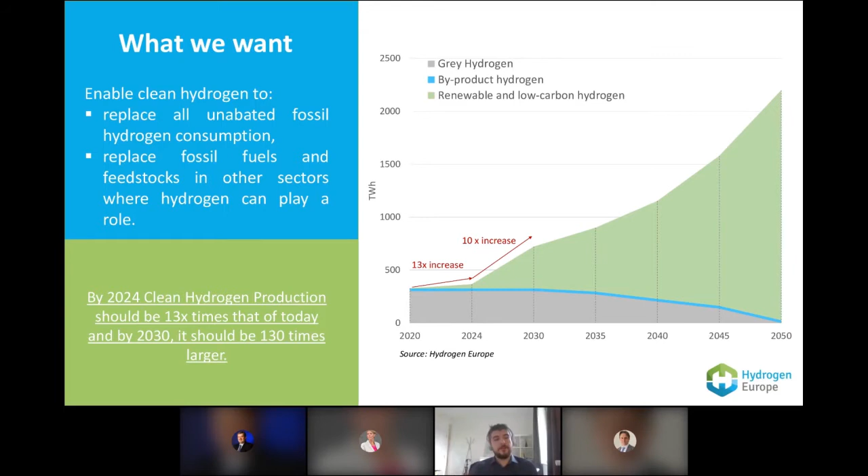So, what is the development we are expecting in the next decade? Well, it is very ambitious. As an organization, we are working to replace the consumption of unabated fossil hydrogen where it is used today, and at the same time, replace other fossil fuels and feedstock, gas, coal, diesel, heavy fuel oil, kerosene, in all the sectors where hydrogen can play a role. In quantitative terms, clean hydrogen, for us, will begin taking up market share from both unabated fossil hydrogen as well as other fossil fuels, slowly in absolute terms, up to 2024, but experience a very large scaling up in the years up to 2030. But enough about what we want. That's probably not interesting. What does the EU want?

The European Commission has estimated that the share of hydrogen in Europe's energy mix will be approximately 13–14% by 2050, with some estimates putting it even higher. So in order to prepare for this, they launched last year their vision for an integrated energy system. And within this system, they placed hydrogen as a key enabler of that vision. And it is for this reason that on the same day, they launched the EU hydrogen strategy and the EU Clean Hydrogen Alliance. Together, they would work towards the deployment of 2 times 40 gigawatts of electrolyzer capacity in Europe and in Europe's neighborhood, dedicated to the production of hydrogen.

The vision of an integrated energy system with hydrogen as an enabler enjoys in the EU a very strong political support at the highest level, and this can be seen in the statements and positions expressed on several occasions, both by President von der Leyen as well as by Vice President Timmermans.

Their, and not only their, political commitment to empower hydrogen to finally play a role as an enabler of decarbonization has been a very strong driver behind the increase of attention that we are seeing to hydrogen in Europe today. But why this? Why so much attention and why so much enthusiasm?

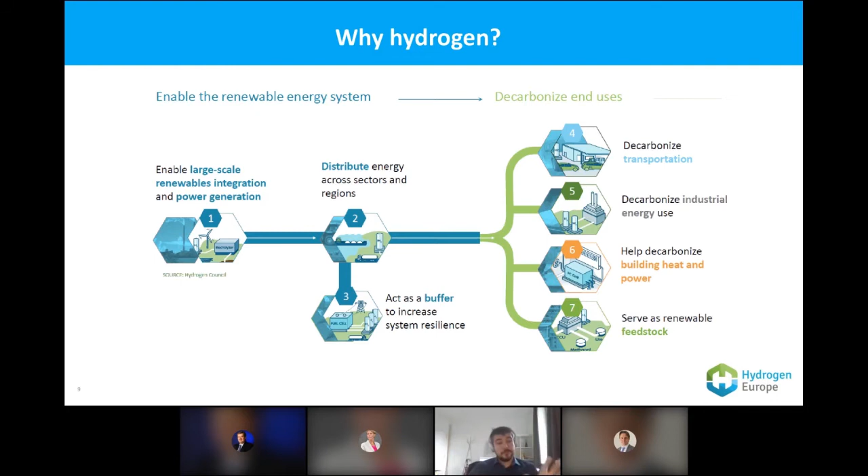This is made possible because in the form of hydrogen, renewable energy becomes easily transportable across time and across space. It is approximately, and this is an oversimplification, 10 to 20 times cheaper to transport renewable energy as hydrogen than to transport it as electricity. And basically, this helps offset the conversion losses that are incurred in the production of hydrogen. But I will get to this point later as well.

Now, these facts were not lost on the world. Most of the world's GDP either has already adopted or is working on a national hydrogen strategy, each of them focusing on unique advantages and needs of their own geographies. For example, Canada is investing heavily in low carbon hydrogen based on natural gas and carbon capture, while the EU is focusing on leveraging their strong renewable energy generation capacity. Japan, on the other hand, is looking to import energy in the form of hydrogen, and it's looking for hydrogen to fuel their large transport sector.

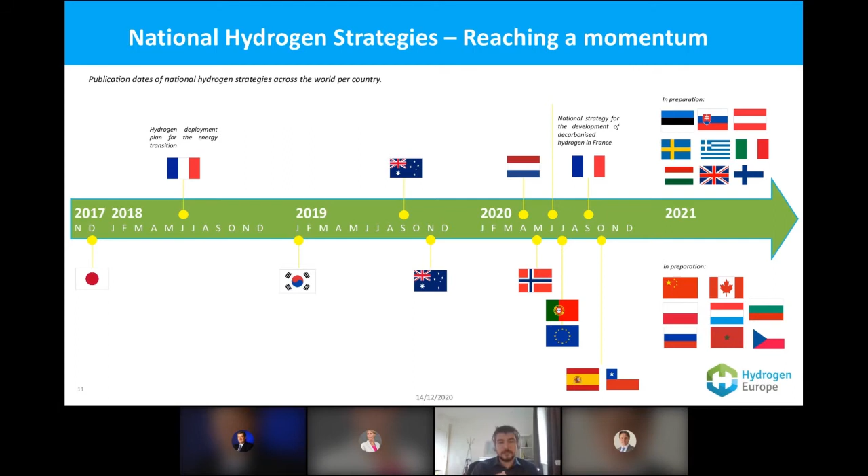The momentum enjoyed by hydrogen at the moment is nothing short of impressive. While things were going rather slow until 2019, with only Japan, Korea, and Australia having a national strategy and France having an initial plan, everything shifted into high gear in 2020. And from where I stand, it shows no signs of stopping anytime soon. Let's look at the EU, the region that I know best.

In the EU, six countries, the Netherlands, Germany, France, Spain, Portugal, and Norway, published national hydrogen strategies. And together, they've earmarked more than 40 billion euros for hydrogen development in their strategies. 13 more countries are currently working on their own strategies. And we look very much forward to seeing how these would look, what measures they will have, what targets they will set for production, and what funding they will make available.

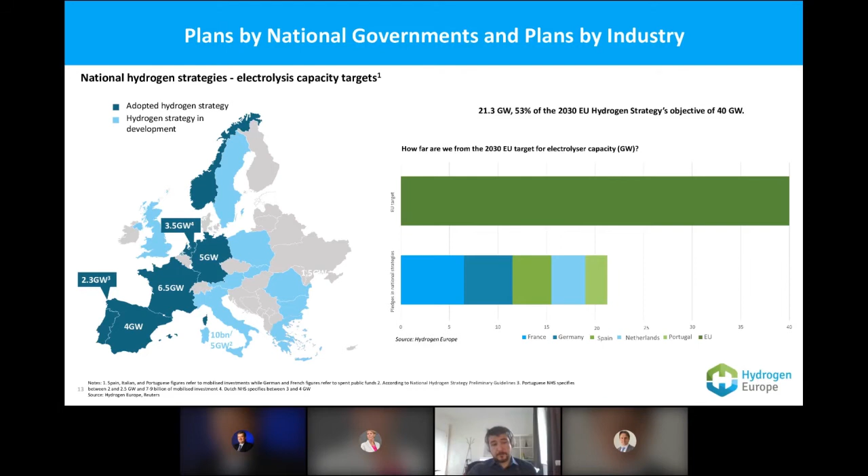In quantitative terms, again, I like looking at things from a quantitative perspective as well. If we sum up the production targets of just the six countries which have published strategies right now, we arrive at around 21 gigawatts of electrolyzer capacity in Europe, which is more than half of the target proposed by the EU hydrogen strategy.

For those of you who are wondering or considering asking me, these are not just political dreams by politicians who just want to say things. This is supported by industry as well. We, as Hydrogen Europe, as the representatives of industry in Europe, we're monitoring the credible and concrete plans to develop hydrogen production in Europe. And we are keeping a database of projects.

So based on our current pipeline, based on what we know so far that has been announced, we are monitoring more than 150 projects amounting to 25 gigawatts of electrolysis capacity to be built until 2030. And this is equal to around 12 billion euros of investment in electrolyzer capacity alone. And that's not counting the other investments in balance of plant and associated renewable energy.

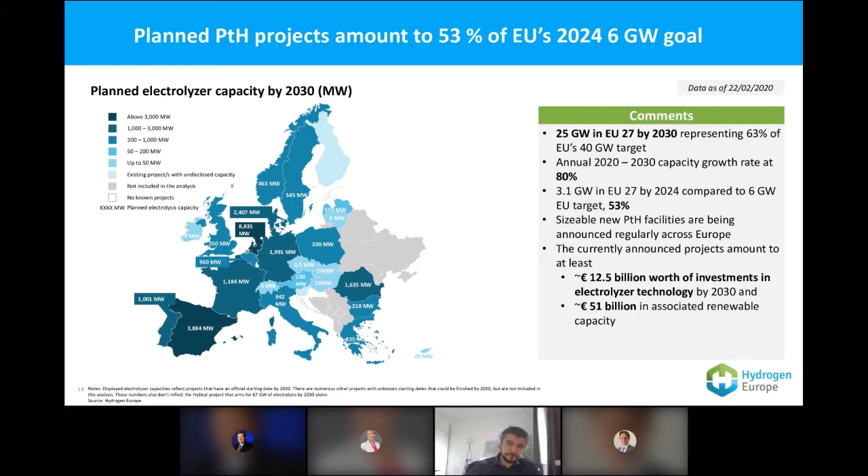But I would like to take a step back. I would like to focus on why. Why are we talking about hydrogen so much? Why is the world talking about hydrogen? Why do we want to produce hydrogen in the first place? How does it really help with higher renewable integration, as I mentioned at the beginning?

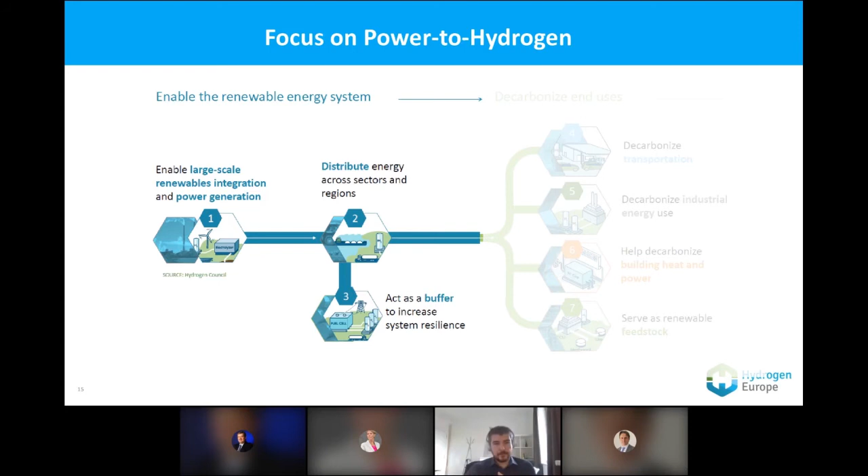Well, the key word of that is variability. Energy production and energy consumption is not stable. It fluctuates daily, weekly, and importantly, seasonally. Everyone here knows this, so I won't insist too much on this point. And not only does it fluctuate in time, it fluctuates in space. We have production areas and we have consumption areas. Some of them are not the same.

But what I would like to say is that even though these temporal imbalances are currently not a big issue, they are all being dealt with efficiently through dispatchable power plants, with pumped hydro storage and other storage solutions. But as we move towards full decarbonization, this picture will change radically, and will change in 2 major ways.

One, as we move towards more electrification, the electrification of transport, electrification of heating, this would alter the standard electricity load characteristics. Especially the electrification of heating will have a huge impact on seasonality.

And the second shift is, of course, the growing penetration of variable renewable energy, which will not only remove the flexibility given by fossil fuels at the moment, but will also generate new challenges related to the irregular character of RES. So it is practically undisputed that achieving carbon neutrality in an efficient way will require energy storage. And I have to thank the presentations before me for making this point, so I don't have to.

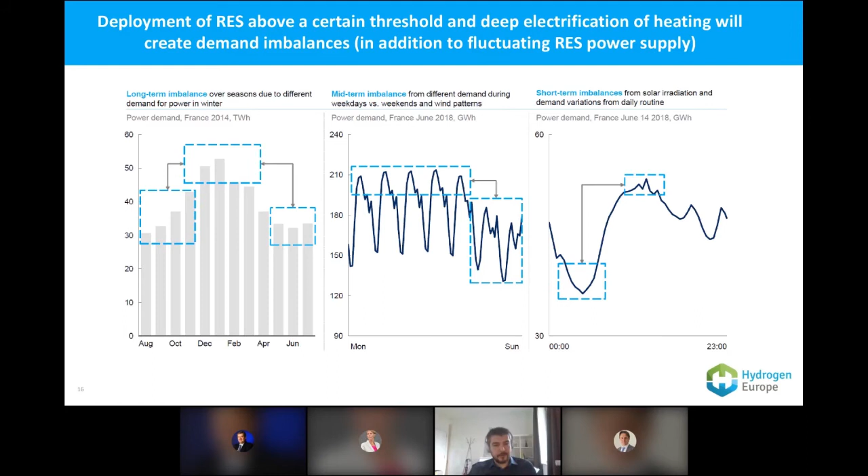And as we saw from today's presentation by Anneli, there are many options for energy storage. But when it comes to large scale and seasonal storage, there are very, very few options that can play this role as well as hydrogen does.

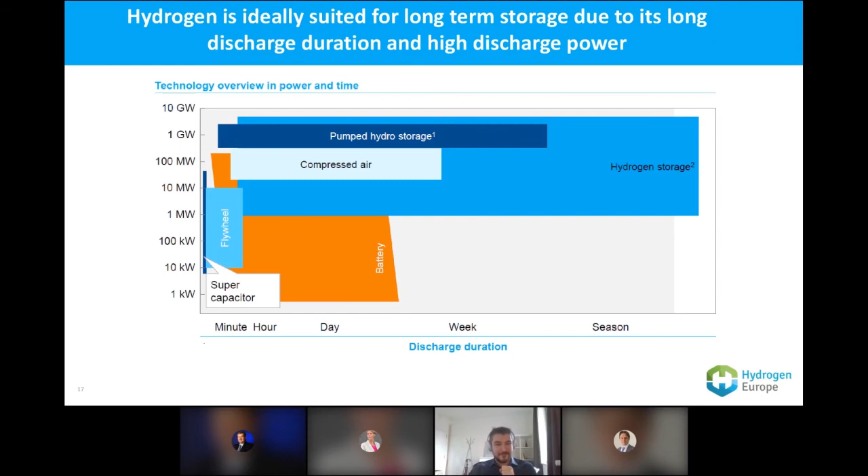I won't insist too much on this because we've already heard 30 minutes from Anneli, but practically, in the face of all the challenges that I mentioned earlier, to decarbonize at the same time transport, heating, power, the only option is to either produce hydrogen or to structurally build an overcapacity of renewables. And it's easy to see why building overcapacity of renewables is quite a bad economic option and is not realistic.

So the relationship is very, very clear. The more renewables you have in your power system, the more power to hydrogen you need to enable it. And of course, the amount will differ system to system, and it will depend on a number of factors like the mix of the renewable energy, whether it's PV or offshore, whether you have in that country availability of other storage means such as pumped hydro, etc.

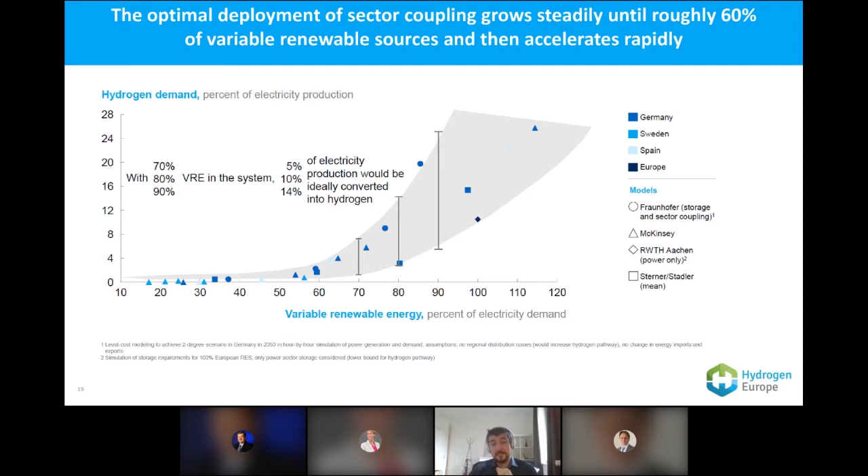But the key is to remember that this graph here, designed by various research institutes in Europe, only looks at balancing the power system and how much hydrogen you need to produce to balance the power system, and doesn't take into account that the power system is only 20% of total energy demand. So this graph looks at power to hydrogen only from a balancing perspective and doesn't consider how much hydrogen you actually need to meet demand for hydrogen in the other consuming sectors that I mentioned earlier.

And as I said before, achieving carbon neutrality will require renewable energy, not just for electricity supply in the power sector, but also for heating, for mobility, for aviation, for shipping, for industry. To decarbonize all these, we will need much more renewable energy than what is required to just decarbonize the power grid. So the question is now, how are you going to deliver all that renewable energy?

And I want to start with how you won't be able to do it. And I know this has taken so much space in the debate, but I need to show you this. You won't be able to deliver this renewable energy with the electricity grid alone. Here you can see a simple, and I will admit it's an overly simplified simulation using a tool provided by the Electricity TSO Association. And it shows what would happen if you would add just 100 gigawatts of offshore wind in the North Sea. Basically, what it shows is a complete collapse of the grid.

And for reference, the EU offshore wind strategy sets a target of 300 gigawatts of offshore wind by 2050. And in reality, much more will be needed, also with the addition of onshore wind and solar PV. So I cannot stress this enough. If renewable energy producers want to access the sectors that are not currently using electricity with renewable energy, the power grid on its own will not be their solution. The current way of doing things, where you just develop a RES park and plug it into the grid and see what happens, won't work anymore in a system dominated by renewable energy and a system that needs to be fully decarbonized.

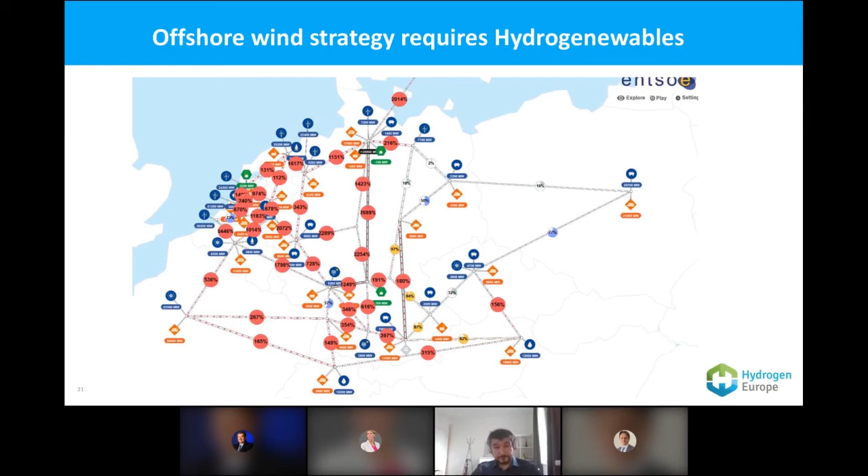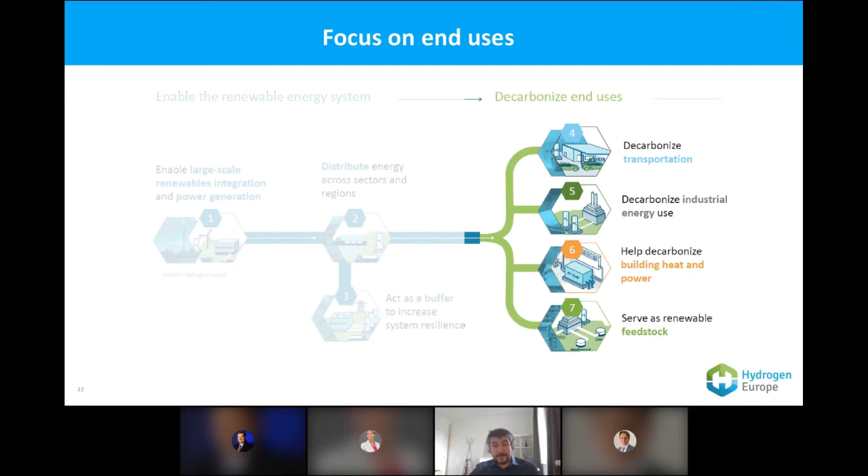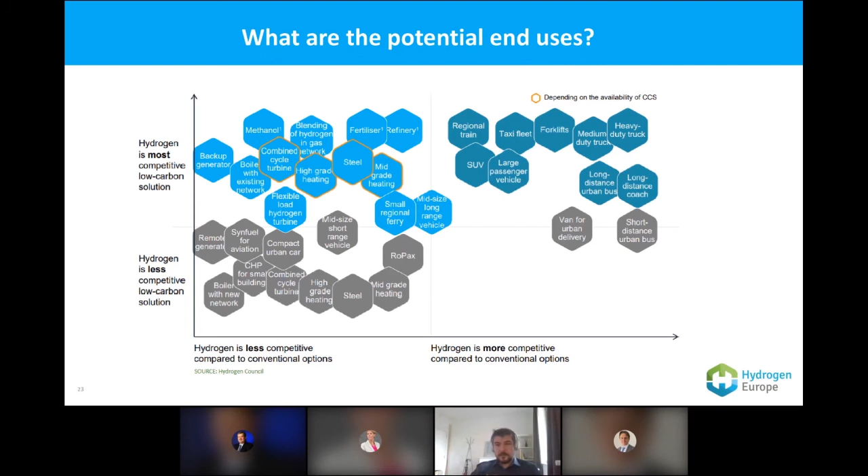But of course, I have to say that not all mobility applications are equally attractive. The general rule of thumb for hydrogen is that the more heavy duty the application is, the more it makes sense for that application to go for hydrogen than batteries. And of course, both technologies are developing, so this is not a fixed picture. But the general rule of thumb is this one: the more heavy duty, the more it leans into hydrogen.

And I want to present something to this forum, that for shipping or for aviation, it will most probably be synthetic fuels in the short term and not pure hydrogen. So synthetic kerosene for aviation and potentially green ammonia for shipping. We have made a very, very thorough analysis of the cost competitiveness of all types of fuel that are possible in the maritime sector, for example, and the results were, to us, very eye-opening.

So by far, across the spectrum of different ship types, the only fuels that made sense were hydrogen-based. Compressed hydrogen for small ships with small ranges, liquid for medium ships, and ammonia for the largest vessels. And this will require a tanking, bunkering, and logistics chain spanning the entire globe to service this maritime industry.

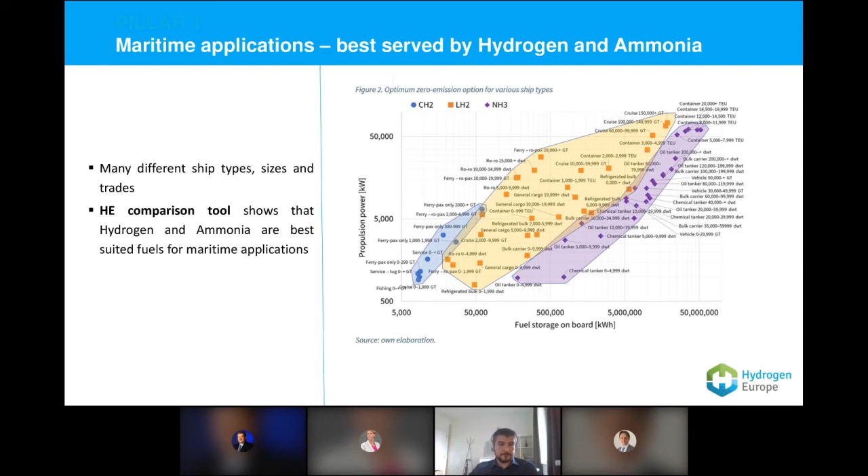And I want to leave you with one piece of information before we go into the questions. I focused my presentation today on Europe, as it is what I know best, but the logistics chain of the hydrogen sector will be global. The Hydrogen Council has recently published a very well-written analysis of the evolution of the sector from a cost-competitive perspective. And in it, you clearly see where the demand and where the production centers will be. And when analyzing this, you clearly see a global picture.

Yes, there will be different pathways, with some regions focusing on natural gas and CCS, and others heavily leveraging their renewable energy generation capacity. But what is clear is that, given the global range of distribution of the consumption and production centers, hydrogen will be a globally traded energy commodity and will be at the core of a global integrated energy system. So if there's any message I would leave you with today, it is this one.

I think you can begin preparing and planning for this future, and your companies do play a role in enabling such a global system. I'll stop there to be able to open the floor for questions. So please go ahead.

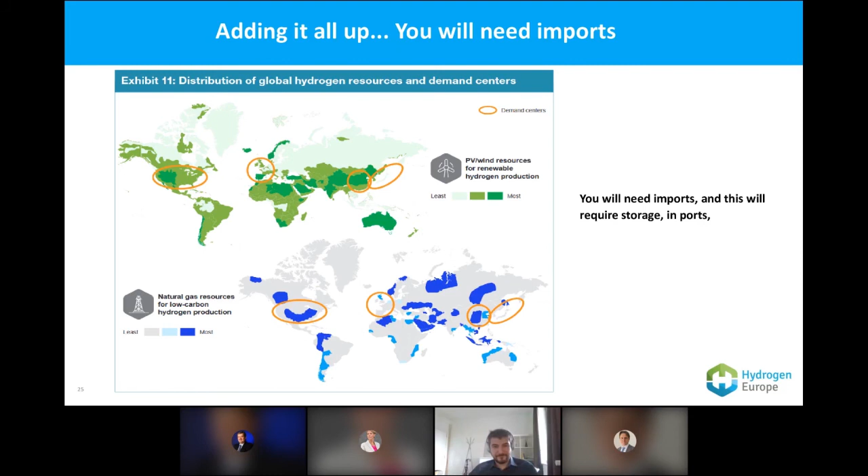Hi. Yes, thank you very much, Alexandru. So questions, let me see what we have here.

One of the questions that I myself would like to put forward is, you talked a lot about hydrogen, of course, and ammonia as being one of the carriers. I haven't heard you mention methanol. I understood that's also a way of carrying hydrogen as energy, and of course, being liquid, it's much more suited for the tanks we have. Most of the people here have tanks that are much more related to liquid rather than gas, or cryogenic or high pressure gas.

Yeah, thank you, Mike. Excellent question, and very relevant for today's group. As I mentioned, we've made an extremely thorough deep dive analysis of the different pathways for all the different fuels that are possible in the maritime sector. I think we will publish this report in full very soon. I'm not sure we have already. We've published several extracts from it, but we will publish the full results. And we've obviously looked at methanol.

Now I'm speaking from memory of a more than 100-page report, so I apologize if I make any mistakes. But when it comes to methanol, there were two arguments that pushed it a little bit lower in attractiveness as a fuel. The first one being the cost aspect. That was how we judged all the different fuels, on the basis of their cost competitiveness. And in fact, producing methanol from renewable energy and from renewable hydrogen would be more costly than the pathway that leads through liquid hydrogen or through ammonia. So that is the first argument. It's simply a more costly process to produce the green methanol.